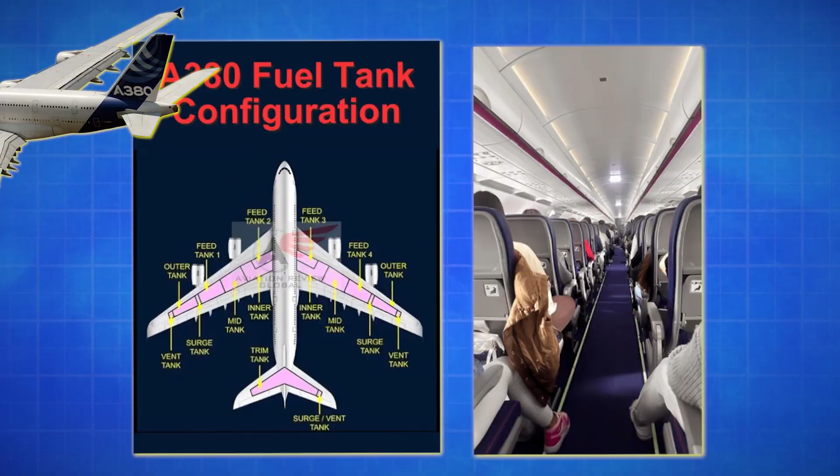The Airbus A380 weighs 575 metric tons at takeoff. That's 1.27 million pounds of metal, fuel, and 600 passengers, somehow rising into the sky at 170 knots and climbing to 39,000 feet.

Common sense says it should be pinned to the Earth. Physics says otherwise. But here's the part nobody tells you: the reason your science teacher gave you for how a wing creates lift is wrong. Not slightly wrong, fundamentally wrong. And at 575 tons, that mistake is the difference between flying and falling.

Today, we're going inside the 4 engineering systems that keep the world's heaviest passenger jet in the air. Once you finish this video, I promise you'll never look at a takeoff the same way again.

In 1903, the Wright brothers flew 120 feet in 12 seconds. The aircraft weighed 605 pounds. Since then, the entire story of aviation has been about one engineering question: how big can we make this thing before physics says no?

The Boeing 747 answered that question for almost 3 decades. 4 engines, a double-deck nose, capable of carrying 400 passengers across an ocean.

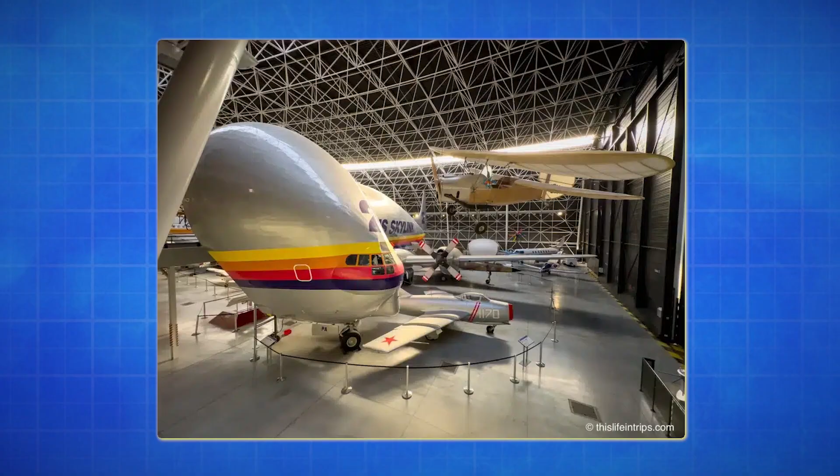Then, in 1988, inside Airbus's engineering campus in Toulouse, a man named Jean Roeder started running secret feasibility studies. He wasn't trying to build a better 747, he was trying to build something Boeing couldn't.

The plan was audacious, an aircraft with 2 full passenger decks running the entire length of the fuselage. Maximum takeoff weight, 575 tons. Wingspan so wide it would force every major airport in the world to rebuild its gates.

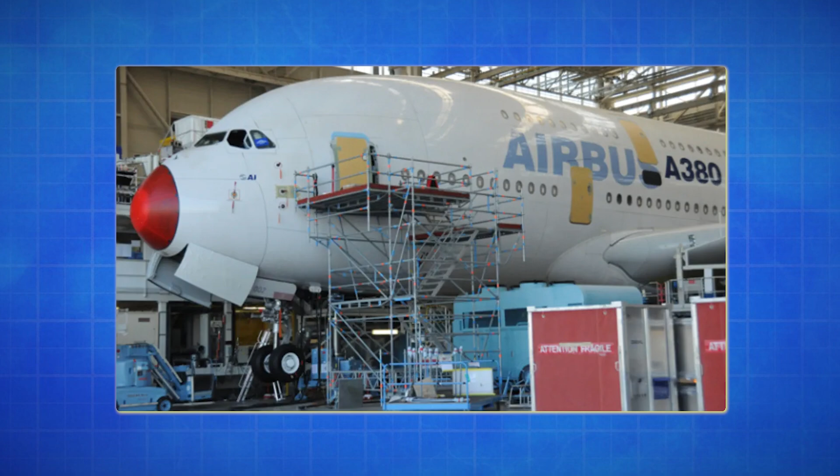Airbus went public with the idea at the Farnborough Air Show in 1990. By December 2000, the Airbus board voted 9.5 billion euros to build it. The aircraft was renamed A380.

On April 27, 2005, registration FWWOW lifted off from Toulouse-Blagnac. 2 captains in the cockpit, Jacques Rosay and Claude Lelaie. They flew for 3 hours and 54 minutes.

When Rosay landed, reporters asked him what flying a 575-ton aircraft felt like. He said it felt like handling a bicycle. For anyone who had spent 5 years calculating whether this could even be done, the precision of that understatement was its own kind of engineering poetry.

But how do you actually make a building-sized aircraft handle like a bicycle? That's a question with 4 answers. Let's start with the part everyone gets wrong.

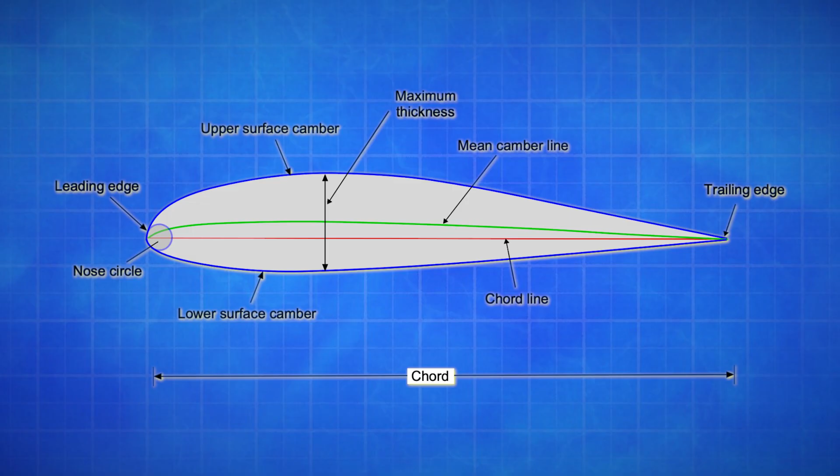If you've ever taken a high school physics class, you've seen this diagram. The wing has a curved top and a flatter bottom. Air flowing over the top has to travel farther than air flowing underneath, so it moves faster.

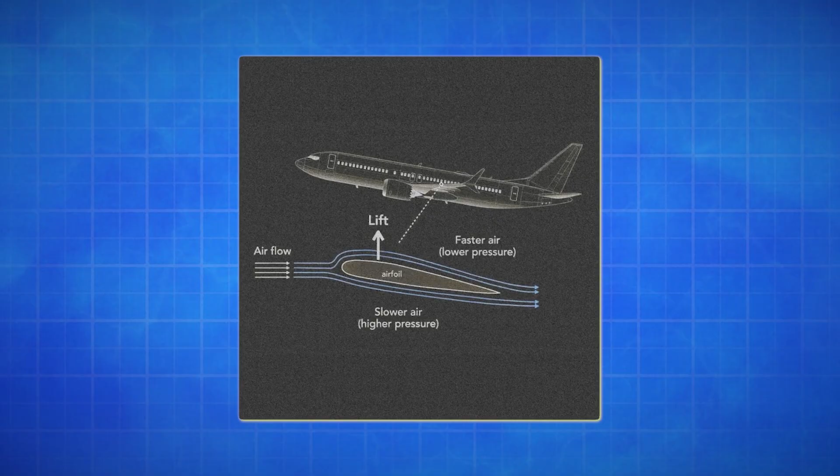Faster moving air has lower pressure. Lower pressure on top means the wing gets pushed upward. Sounds clean. Sounds logical. It's also wrong.

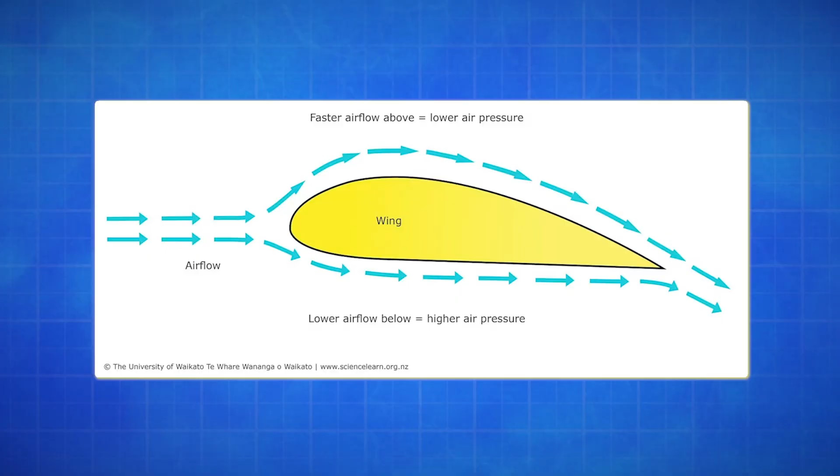NASA has explicitly stated that this explanation, called the equal transit time theory, is incorrect as a complete description of lift. The 2 air streams don't actually meet at the trailing edge.

The air over the top arrives there well before the air underneath. The theory falls apart the moment anyone measures it.

So what is actually keeping a 575-ton aircraft in the sky? The real answer involves 2 physics principles working together. The first is what your textbook tried to teach you.

There genuinely is lower pressure above the wing and higher pressure below it. That part is true. But the bigger story is what the wing does to the air it touches.

When the A380's wing slices through the atmosphere, the tilted shape of that wing forces the entire column of air around it to deflect downward. Tons of air per second, pushed toward the ground. Every action has an equal and opposite reaction. The air gets pushed down, the wing gets pushed up.

That's it. If you've ever held your hand flat out of a car window at 60 miles an hour, you already know how this works. Flat palm, almost no lift. Tilt the palm up slightly, and you feel the wind force your hand toward the sky.

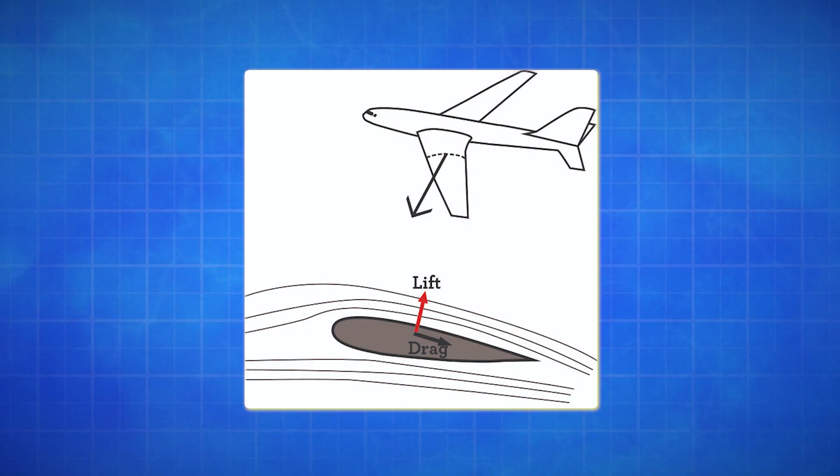Engineers call that angle of attack, the angle between the wing and the oncoming air. It's the single biggest variable in whether a wing produces enough lift to fly.

Now here's where things get interesting. The A380's wings have a total surface area of 845 square meters, nearly the size of 3 NBA basketball courts.

At cruise, those wings are deflecting roughly 5.6 million newtons of force downward every second. That's the lift needed to support 575 tons.

Every second, every wing, every flight, the physics gets written down as the lift equation: lift equals 1/2 air density, times velocity squared, times wing area, times the lift coefficient. The two things engineers can change are wing area and the coefficient. The two things they can't are air density and your speed.

And that's where the A380 has a problem. At 39,000 feet, the air is roughly 1/4 the density of the air at the runway. The engines are weaker up there, and the wing produces less lift at the same speed. To compensate, the aircraft has to fly fast, around Mach 0.85, roughly 567 miles per hour.

But fly too fast over a normal wing, and a different problem appears. Air flowing over the top accelerates so hard it goes supersonic. Shock waves form, drag spikes. The aircraft starts shaking itself apart.

So Airbus engineered the wing to cheat physics. The A380's wing has what's called a supercritical airfoil. The top of the wing is flattened, almost level. This delays the moment when airflow over the top goes supersonic, letting the aircraft fly faster without paying the drag penalty. The wing is also swept back at 33.5 degrees, which buys it even more high-speed efficiency.

But the supercritical airfoil has a cost. It's less efficient at low speed, which is why during takeoff and landing, the A380's wings transform. Slats extend from the leading edge, flaps extend from the trailing edge. The whole wing changes shape, growing larger, adding curvature, generating dramatically more lift at slower speeds, straight out of Transformers.

The landing speed is just 130 to 135 knots, astonishingly slow for something this heavy. The takeoff run at full weight requires a runway just under 3,000 meters long, 3 kilometers of asphalt to accelerate 575 tons through air thick enough to lift it.

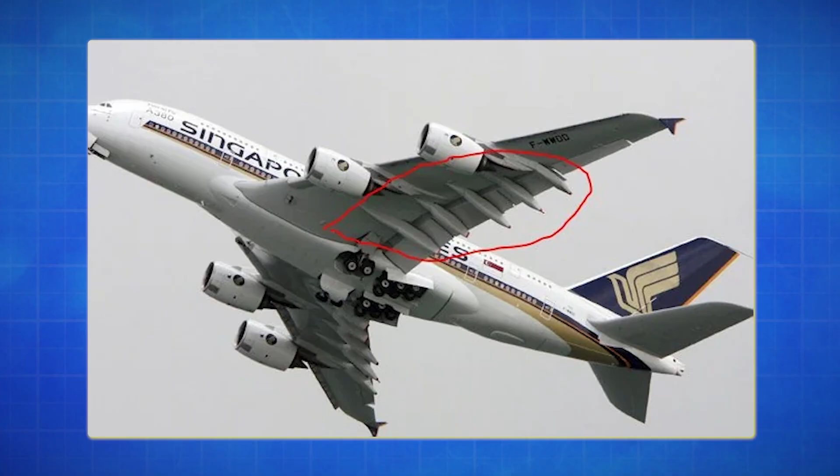And here's the number that should make you uncomfortable. Wing loading is the weight an aircraft places on each square meter of wing. The A380's is 680 kilograms per square meter. Every square meter of that wing is carrying the weight of a fully grown horse, at 39,000 feet.

But there's a limit to how hard you can push a wing. Angle it too high, and the smooth airflow on top separates from the surface. Lift collapses, the aircraft stalls. For the A380, that happens around 18 degrees of angle of attack, and at 575 tons, recovery from a stall isn't quick. So the wing is doing two impossible things at once: generating enough force to hold the equivalent of 7,500 humans in the sky, and doing it without ever asking for more than physics will give.

That's Act 1, the wing.

But the wing is only useful if it's bolted to something that doesn't shake itself apart. If you watch an A380 wing during takeoff from the right seat angle, you can see something that looks like structural failure. The wingtip bends upward by as much as 4 meters. That's not a defect, that's the design. A rigid wing at this scale would crack under load.

The bending forces at the wing root of an A380 at takeoff are equivalent to suspending two fully loaded Boeing 737s from each wingtip. During a 2.5 G turbulence event, multiply that by 2.5. The solution is engineered elasticity. The wings are designed to flex up under load, distributing stress like a bow being drawn back. If engineers tried to fight that flex with extra structural mass, they'd add weight the aircraft can't afford.

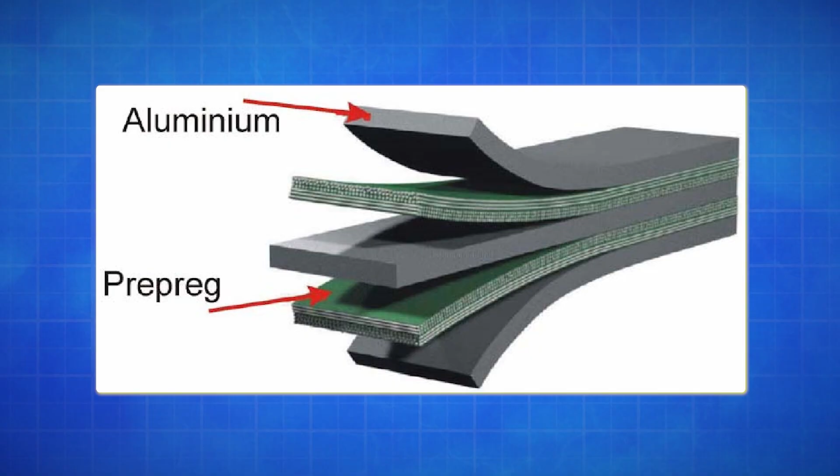So the entire airframe is a precise recipe: 61% aluminum alloys, 22% advanced composites, 10% titanium and steel. The remaining 3% is a hybrid material called Glare. Glare is fascinating. It alternates thin sheets of aluminum with layers of S2 glass fiber bonded in epoxy resin. It was developed at the Technical University of Delft in the Netherlands in the 1980s and patented in 1987. It's 25 to 30% lighter than pure aluminum at the same strength.

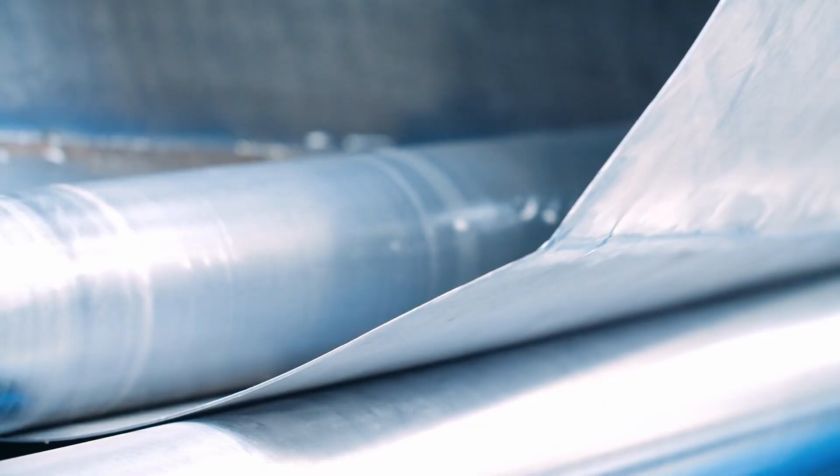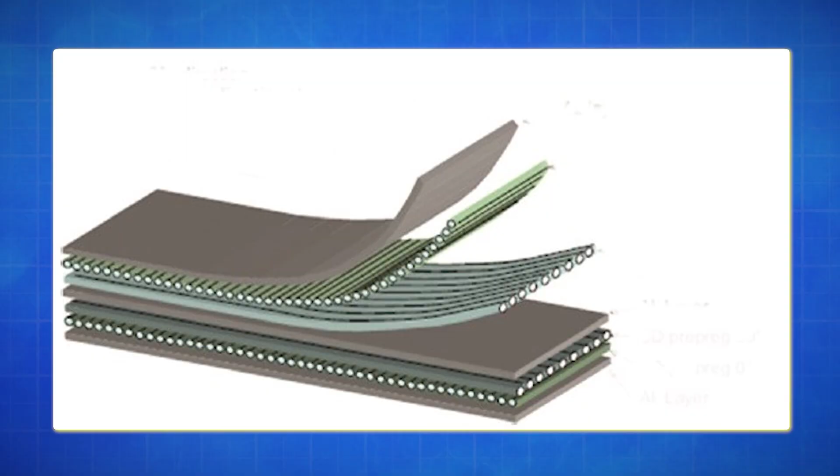And here's the part that matters at altitude: if a crack starts in one of the aluminum layers, it travels outward until it hits a glass fiber layer. Then it stops, dead. Each fiber layer is a built-in crack arrestor. Think of it like plywood, layers alternating direction, so a flaw in one is contained by the next. The A380 was the first commercial aircraft to use Glare in serious quantity.

Upper fuselage panels, the same panels that have to survive 50,000 pressurization cycles over an airframe lifetime. At cruise, the cabin is pressurized to the equivalent of 5,000 feet, while the outside air at 39,000 feet is pressurized to almost nothing. That differential pushes outward on every square inch of the hull with a total force equivalent to nearly 100,000 tons.

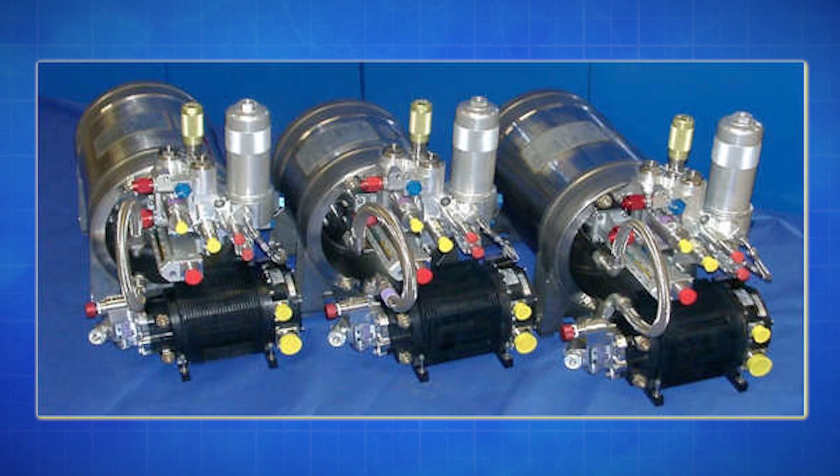The fuselage is constantly expanding and contracting, almost like it's breathing. Every flight cycle is one breath, tens of thousands of breaths over an aircraft's life. Running through this expanding, contracting structure is a hydraulic system operating at 5,000 pounds per square inch, more than double the pressure of standard commercial aircraft. Higher pressure means smaller pipes and lighter actuators. Every gram counts when you're carrying 575 tons.

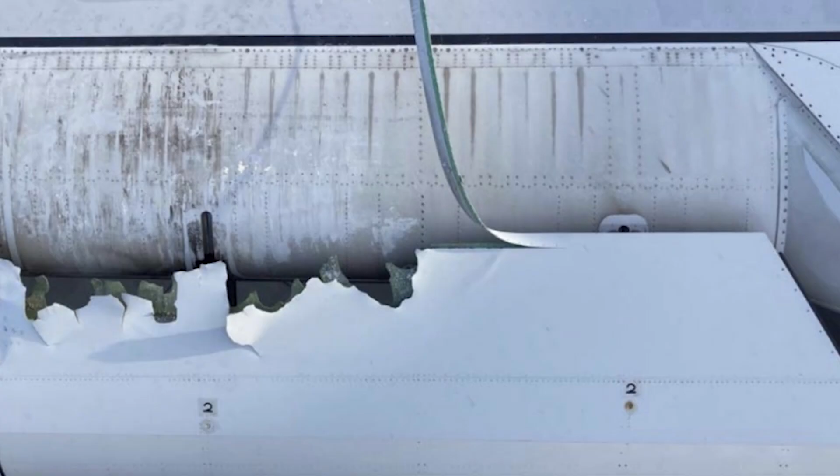But here's the part of the structural story Airbus doesn't put in the brochure. On February 14, 2006, in a structural test facility in Toulouse, engineers were loading the A380's wings to destruction. Certification rules require commercial aircraft wings to survive 150% of the maximum expected in-flight load without failing. The hydraulic rams pushed the wingtips up and up and up. At 145% of limit load, the wings ruptured, both wings symmetrically, 3.3% short of the required mark. There was no disguising what that meant. An aircraft designed to carry up to 853 passengers had just failed its safety test on Valentine's Day.

Airbus's spokeswoman called for what she described as refinements. The fix was 30 kilograms of stringer reinforcement strips added to every airframe. The certification went through, but the wing problems weren't over.

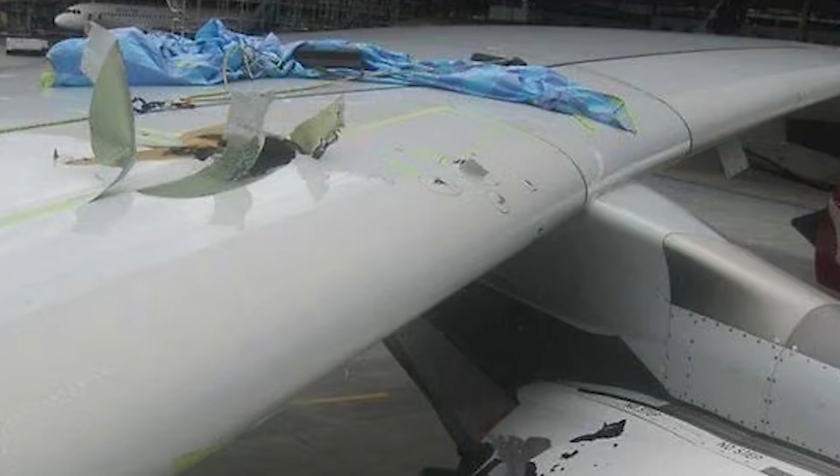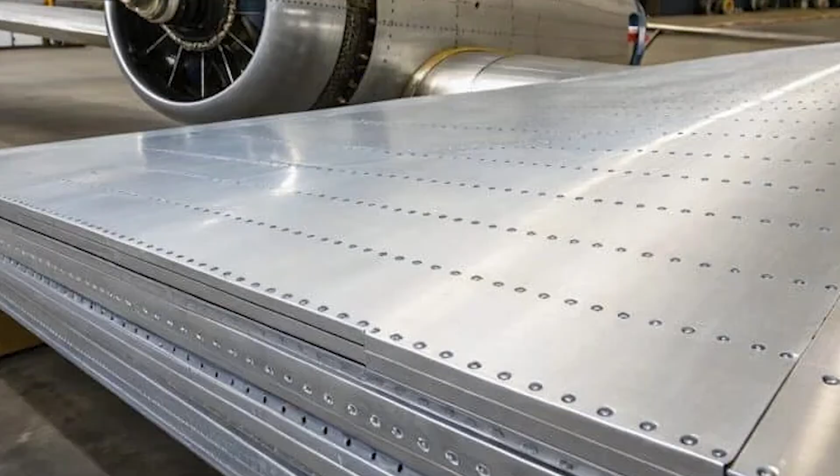Six years later, in January 2012, Qantas mechanics inspecting an A380 found hairline cracks in something called wing rib foot brackets, small L-shaped fittings that connect wing ribs to skin panels. By February 8th, EASA had ordered inspections across the entire global fleet. The agency's spokesperson said inspectors were finding cracks in almost every plane they checked. The root cause was the alloy, a high-strength aluminium called 7449 used in the first 120 aircraft. It turned out to be too brittle for the complex stress cycles where wing ribs meet wing skin.

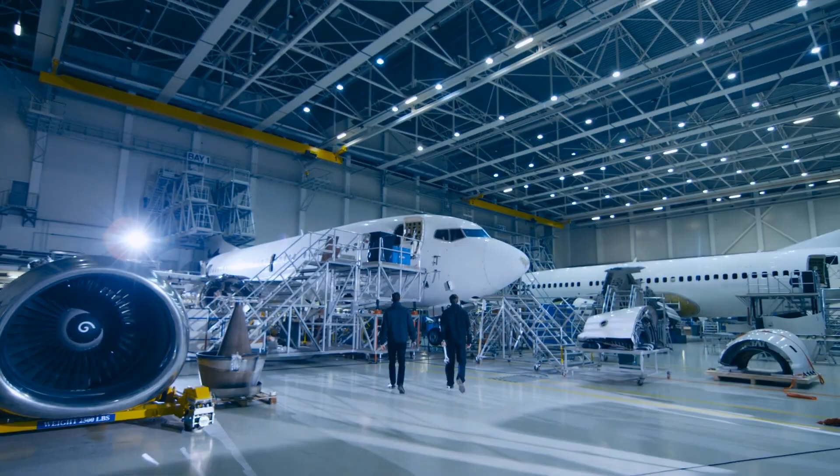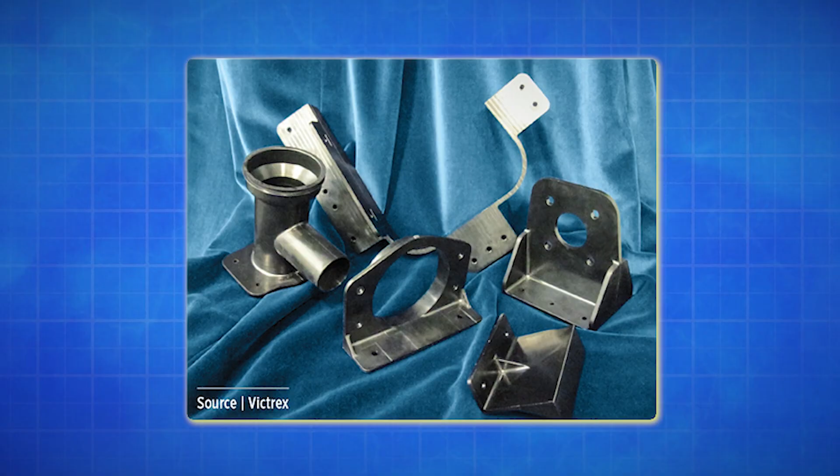Airbus switched to alloy 7010 from aircraft 121 onward. Earlier airframes had their brackets replaced. The total repair cost across the fleet exceeded 500 million euros.

So when you watch an A380's wings flex 4 meters at takeoff, you're not just watching engineered elasticity. You're watching a structure that broke during testing, was reinforced, broke again in service, was reinforced again, and is now flying. The aircraft you see in the air today is the survivor of two decades of structural learning.

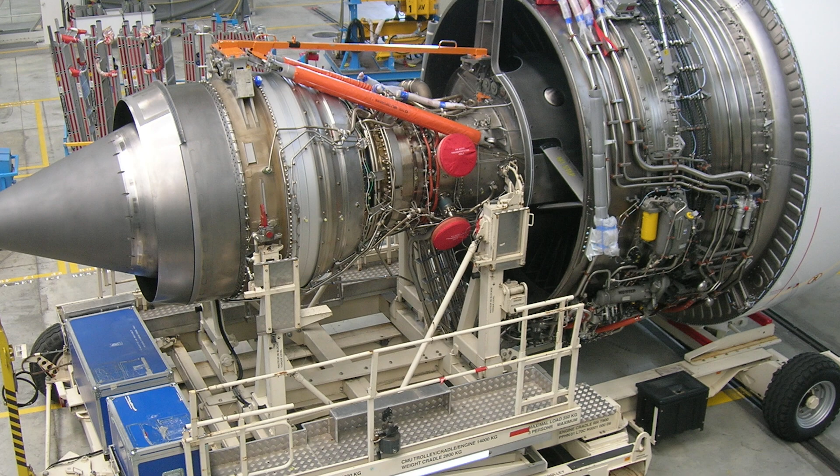That's the body. Now we need to talk about what makes it move. The A380 has 4 engines, either Rolls-Royce Trent 900s or Engine Alliance GP7200s, depending on which airline ordered it. Combined maximum thrust, roughly 300,000 pounds of force. Here's the part most people miss about a modern jet engine: the combustion isn't doing most of the work. A turbofan engine at this scale is basically a giant fan attached to a small jet engine.

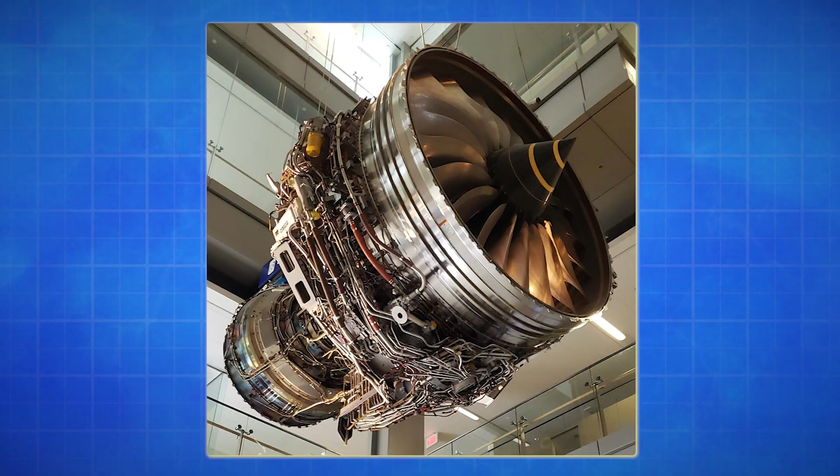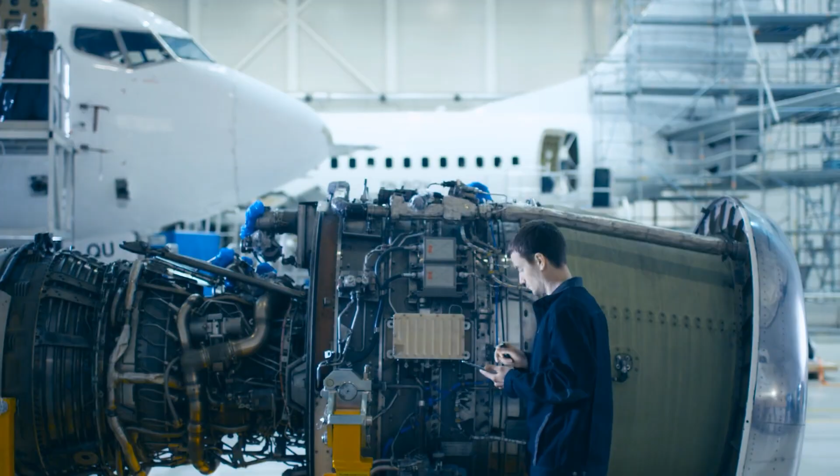The Trent 900 swallows roughly 1,200 kilograms of air every second. The vast majority of that air goes around the central combustion chamber, accelerated by a fan that's almost 3 meters wide. That bypassing air produces about 75% of the engine's total thrust. The hot core just powers the fan. Air goes in, gets compressed about 38 times by stages of compressor blades, mixed with fuel, ignited. The expanding gas drives turbines that spin the fan, which moves the bypass air.

The remaining 25% of thrust comes from the hot exhaust shooting out the back. This is why bypass ratio matters so much. The Trent 900's bypass ratio is 8.5 to 1. For every kilogram of air through the hot core, 8.5 kilograms bypass it. Higher bypass means better fuel efficiency and quieter operation. Lufthansa's A380s produce half the noise of a Boeing 747-200 series, while carrying 160 more passengers.

But efficiency at this scale is relative. The A380 burns 17.5 tons of jet fuel every hour at cruise, around 1 liter of fuel every fifth of a second per engine. A 14,800-kilometer flight can carry up to 253 tons of fuel, which means more than 44% of the aircraft's maximum takeoff weight is fuel. So when you board an A380 from Dubai to Los Angeles, almost half the aircraft you're sitting in is, by mass, kerosene. Now here's where engine design becomes a survival story.

November 4th, 2010. Qantas Flight 32, Singapore to Sydney. Captain Richard de Crespigny is in command of an A380 carrying 469 people. 4 minutes after takeoff from Changi Airport, the number 2 engine, the left inboard Trent 900, explodes.

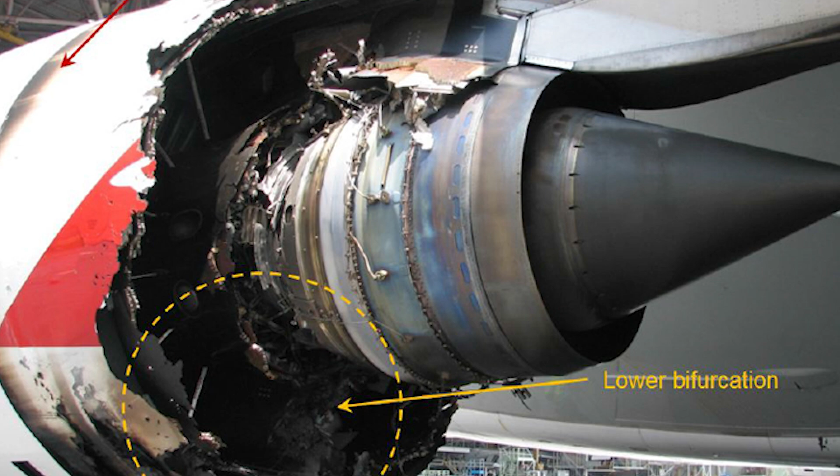Inside the engine, an oil feed pipe with a manufacturing defect had been weeping fluid into the bearing assembly. The resulting fire fractured the intermediate turbine drive arm. The turbine disc, freed from any load, spun up uncontrollably until it burst. Chunks of titanium disc punched out of the engine casing at roughly twice the speed of sound.

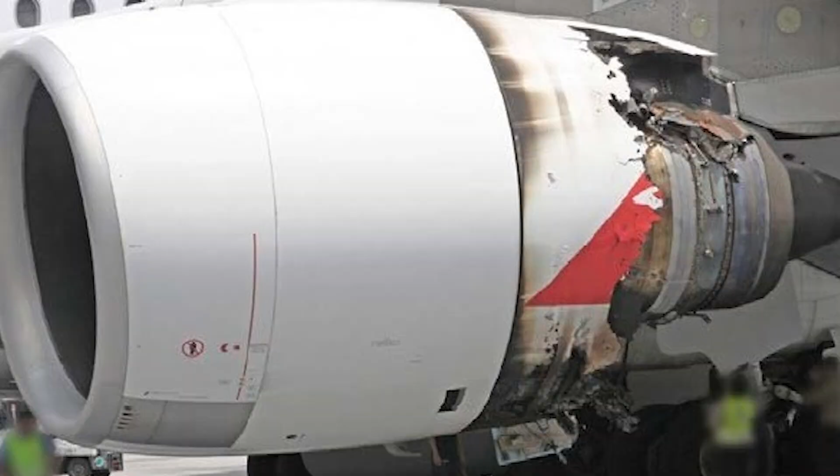Some of those chunks went through the left wing, severing more than 600 wires, puncturing fuel tanks, disabling hydraulic circuits, damaging landing gear controls. The flight deck filled with warning messages, more than 50 ECAM system alerts. Half the aircraft's redundancies were gone. Fuel was streaming from the wing. The aircraft was 50 tons over the certified maximum landing weight.

De Crespigny had 4 other pilots on board that day. They worked through the alerts methodically for 55 minutes, identifying what worked, what didn't, calculating an approach speed that would be safe with the damaged wing. He flew the approach a few knots above stall. The margin was tiny. Too slow, and the wing stalls. Too fast, and the aircraft overruns the runway.

He landed with approximately 100 meters of runway remaining. 0 injuries, 0 fatalities. The Australian Transport Safety Bureau's final report ran 344 pages.

De Crespigny later said the only reason they had a chance was the fuel. They had enough of it to take time and think. We had fuel, and fuel gave us time.

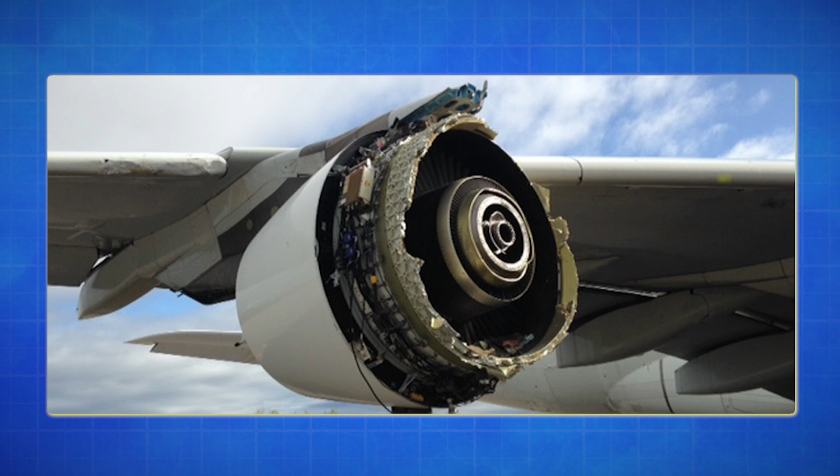The engine that failed had a specific manufacturing defect. Rolls-Royce changed the specification for that oil feed pipe across the entire Trent 900 fleet. Every engine was inspected. Every airline grounded its A380s temporarily. It was the closest the A380 has ever come to a catastrophic loss in over 800,000 flights and 7.3 million block hours of operation. And the reason it wasn't catastrophic is precisely because of how the aircraft was designed.

4 engines, not 2. Triple redundant flight controls. Crew trained to operate with degraded systems. The aircraft kept flying. That's not luck, that's engineering. But there's one system we haven't talked about yet, the one running quietly underneath all of this, making constant invisible decisions.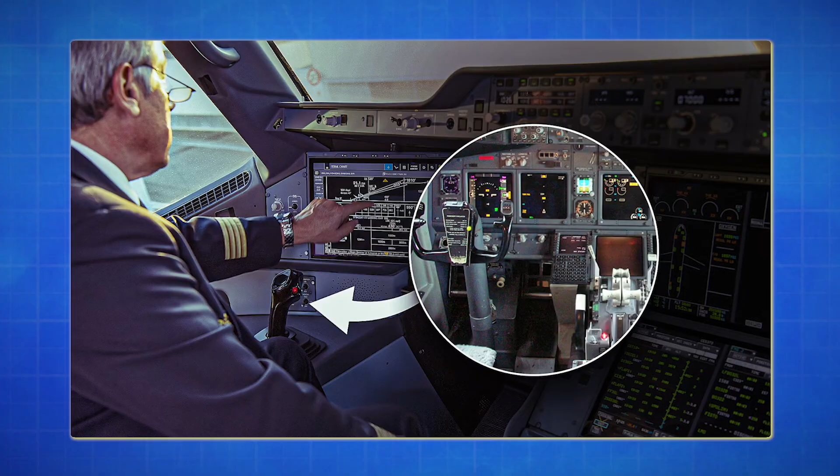If you sit in the captain's seat of an A380, you'll notice something missing. There's no yoke, no mechanical control column running down from the ceiling. There's a small side stick to the captain's left, another to the co-pilot's right. That side stick doesn't move anything, it just sends an electrical signal. The A380 is a fly-by-wire aircraft, 4th generation.

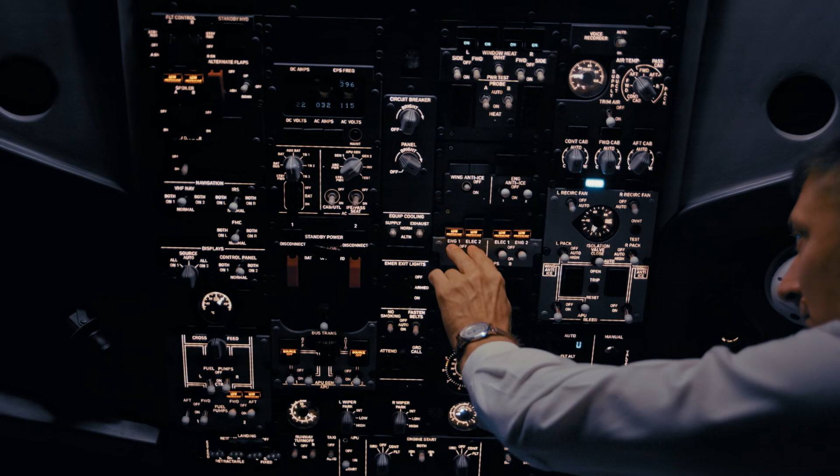Every input the pilots make is routed through flight control computers that decide what the aircraft should actually do. The computers cross-check the input against the aircraft's current state. They check whether the input would exceed structural limits. They check whether it would stall the wing. Only then do they signal hydraulic actuators to move control surfaces.

The pilots aren't flying the aircraft directly. They're requesting that the aircraft fly a certain way. The aircraft decides whether their request is reasonable. If you came up flying older jets, that sounds horrifying. If you came up flying Airbus, you know it's exactly why this works at 575 tons.

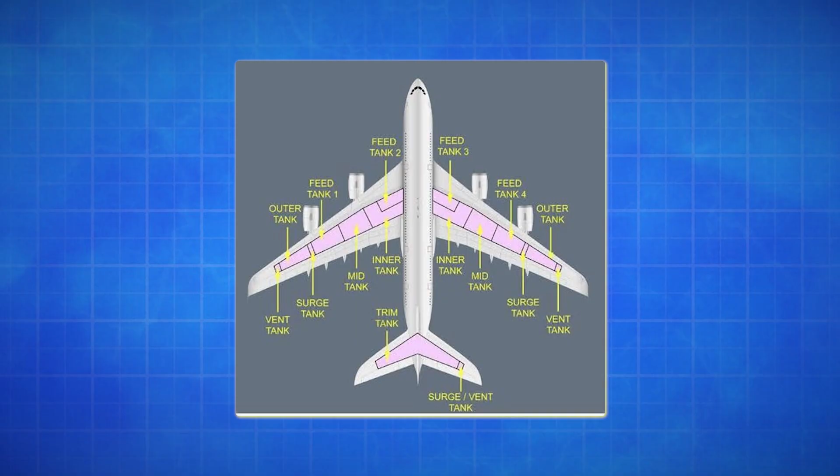But here's the system that fascinates engineers: the A380's fuel management and monitoring system. The aircraft has 11 fuel tanks, 5 in each wing, 1 in the horizontal stabilizer at the tail. The tanks are connected by 21 pumps and 46 control valves. The computers running this system are constantly moving fuel around the aircraft during flight.

Why? Because the aircraft's center of gravity matters more than you'd think. Picture balancing a pencil on your fingertip. Hold the pencil with most of the weight forward. It's stable, but takes effort to keep it upright. Move the weight backward and it becomes nearly weightless on your finger. Move it too far back and the whole thing tips.

The A380 in flight is balancing the same way. The wings provide lift. The horizontal tail at the back provides a downward force to keep the nose pitched correctly. The further forward the center of gravity, the more downward force the tail has to produce. That downward force is drag. Drag is fuel.

During cruise, the A380's fuel system pumps fuel from the main wing tanks rearward into the trim tank in the horizontal stabilizer. This moves the aircraft's center of gravity backward. Less downward force is needed from the tail, which means less drag and less fuel burned.

The system is doing this constantly, in real time, with fuel quantity accuracy of plus or minus 1%. The probability of an erroneous but believable fuel reading is engineered to be less than 1 in a billion per flight hour. And remember those flexing wings from Act 2?

After takeoff, the fuel system pumps fuel from inner wing tanks to outer wing tanks. The added weight at the wingtips pushes the wings back down, reducing the bending forces at the wing root. The fuel itself becomes a structural component. The wing and the fuel system are the same machine.